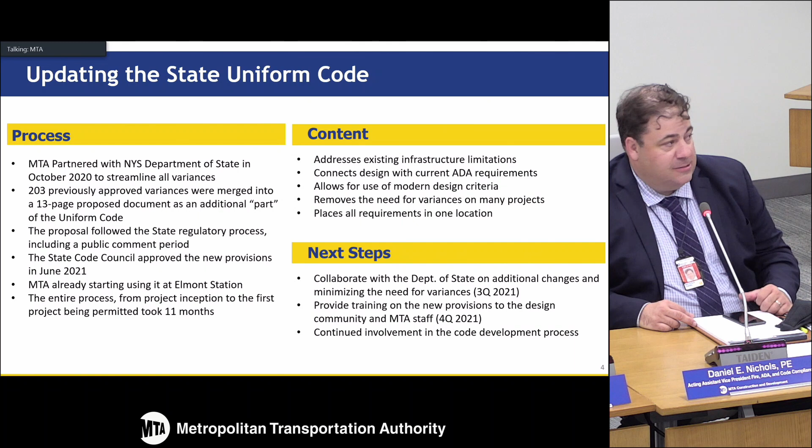I'll just add that it wasn't mentioned at the outset, but Dan Nichols, who's making this presentation, happens to be one of the premier experts on New York State Building Code, and we were very lucky to have him join the MTA team to help develop this, because it saves an enormous amount of time going through the bureaucracy of getting code variances, since the building code was not aligned for mass transit facilities.

Kevin: I think this is a great idea. Just curious, who issued the first permit for Elmont - was it a village, a town, or the county, and then we were able to amend it on our own? Response: No, we worked forward, and Elmont understood they would need a variance to do this, which in normal times would have been a 3 to 6 month extended process. But we were right in the middle of this adoption process through the regulatory process, and we had indicators along the way that we would, if it didn't work, pull the plug at the end and go to a variance. We had that ready to go, but luckily the Code Council voted in June, and away we went.

Is this only for buildings, or should MTA be able to issue its own town curb cuts and highway permits and things like that? Is that envisioned in what you've already done, or is that something for the future? We are going to do much more modification as the law, the Uniform Code Act, allows us to, which has a lot to do with jurisdictional authorities. There's a lot more work to do, and that's one of the items on our list to work on.

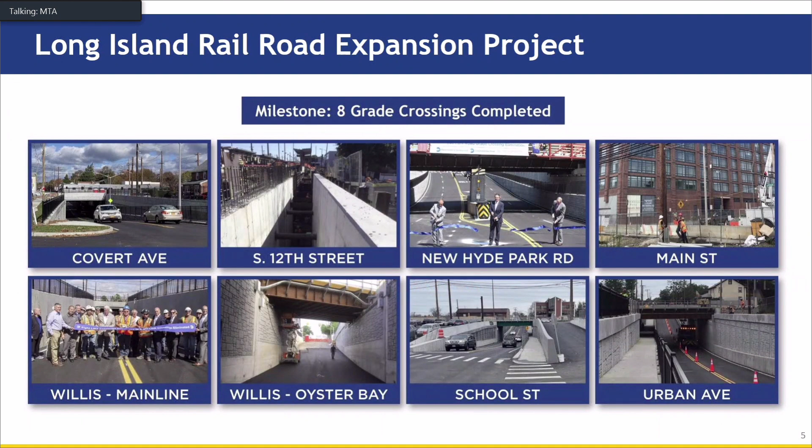Just three project updates, if I could. Some speakers may have already mentioned this, but the milestone of getting 8 undergrade crossings completed for the 3rd Track Project has been achieved. Most notably, the double crossing at Willis is now open. To correct the record, the crossing at Willis was not wide enough to put in a sidewalk, so we were about to put in an overpass bridge, which will be there next. Key to the completion of these 8 crossings, and at Willis, is that it allows us to move forward with all the work in Mineola, which is really the critical path of the project. That is well underway and still on target.

What's the status of Main Street in Mineola? Main Street in Mineola is closed. There's supposed to be a pedestrian overpass installed, correct? That pedestrian overpass is about to be constructed now that we can have access to the ground to do that. Yeah, it's underway.

I seem to have lost the presentation. Can we get the deck back up there?

Thank you. I'll get there.

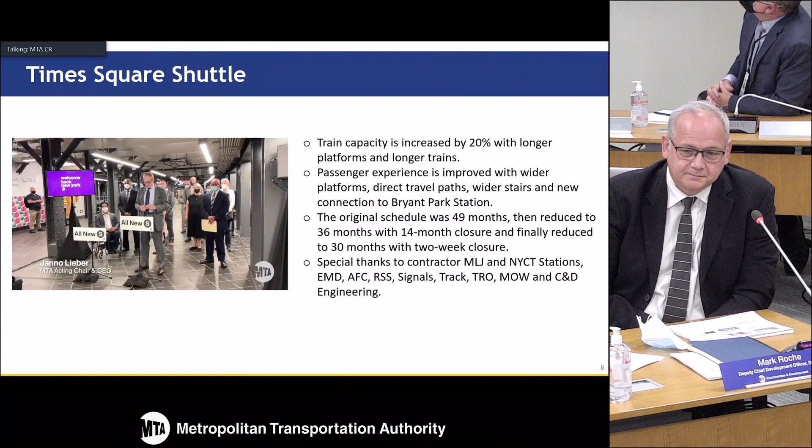Today we add the rebuilding of the Times Square to Grand Central shuttle to our list of accomplishments. The shuttle was part of the very first subway line that opened in 1904. It is among the very oldest parts of our system. Now it's finally been rebuilt.

The new shuttle is easier to navigate. Look at it. The tracks have been straightened, and there's now a single and much wider platform. This allows us to run longer trains with more capacity during the peak hour and to speed boarding, because we all know that the shuttle is all about moving quickly.

This is a very proud moment for construction and development, where we've now made the station fully ADA accessible. We've provided a free transfer over from Times Square to Bryant Park. We had many, many challenges along the way, COVID being one of them. But again, we're very, very proud of this project.

It is really transformational along this 42nd Street connection corridor. Kudos to the project team. They got this work done faster than anyone expected, and it was on schedule and on budget. Those are the words we love hearing. Couldn't have said it better.

Just one final point - all the folks that are involved in this are listed in that last bullet, and I couldn't tell you how much cooperation we've had in those 15 days to make sure that this happened on time. It was an extraordinary feat of coordination between everyone, and I thank everybody very, very much, particularly the operations folks.

Just one update on one of the CBTC projects for a second. This is the QBL line, the Queens Boulevard line. The area in red remains to be completed. Just under 90% of the line is already CBTC enabled. We have delayed the completion of this last section from July of this year to December of this year to enable some of the Thales and Siemens software to be updated.

Given the numbers of folks on the line, we didn't want to have updates to computer software interacting in ways that we couldn't predict. So we're doing some more testing behind the scenes before we implement some of those final upgrades by the end of the year. That's probably new information - that we've delayed it from July till the end of the year.

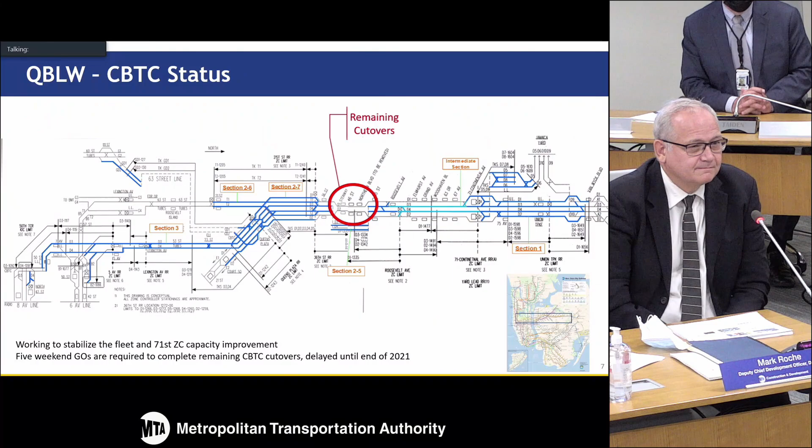So we've all heard the stories about delays to E, F, M, and R trains at various times of day due to this project. Is that because not all of the equipment that runs on those four lines can read the new signals, or is it something else that's causing these delays?

I'll give you an example of the kind of thing that we've been dealing with. Behind the scenes, when we test equipment, we expect a number of signals to be handled by a certain piece of equipment. When we turned on some of the system, we got four times the number of signals being delivered to that equipment, and it didn't know which one to handle first.

So we've had to take that offline and ask, well, what equipment has been sending that signal and why, and what's the priority? It's designed to fail safe, so there's no question about it, but it's just the number of signals in some of the equipment was unexpected, given some of the geometry. That's the typical type of local issue that we've been dealing with.

We're also installing CBTC on portions of the Culver line. Are you experiencing the same issues there? We haven't quite got to that situation yet, or on the 8th Avenue line. That's next, but this is by far the more complicated line, and the software that's been updated for this will hopefully clear the path for those lines.

Did we undergo this kind of disruption on the 7 or the L line when we were doing them? Yes, and very, very similar, but with different equipment. And since this is interoperability, it's sort of the next level of interaction of those equipments. We have upgraded some of the equipment, so it's new issues, but similar to those lines.

I will say that for the future lines, we are looking at the idea of further, more detailed testing in a virtual world to make sure that we can minimize this type of reliability testing in the future.

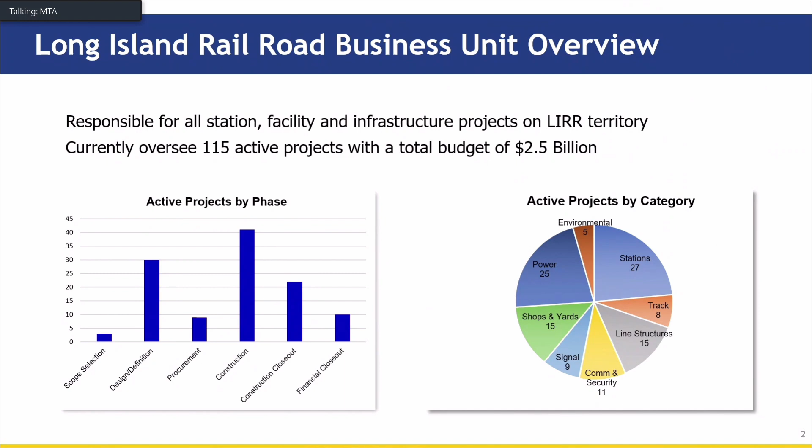It's been a while since we were last here presenting live, since October 2019. We're working on quite a few projects, 115 in various stages, whether in design or construction, representing all the active asset categories that we have.

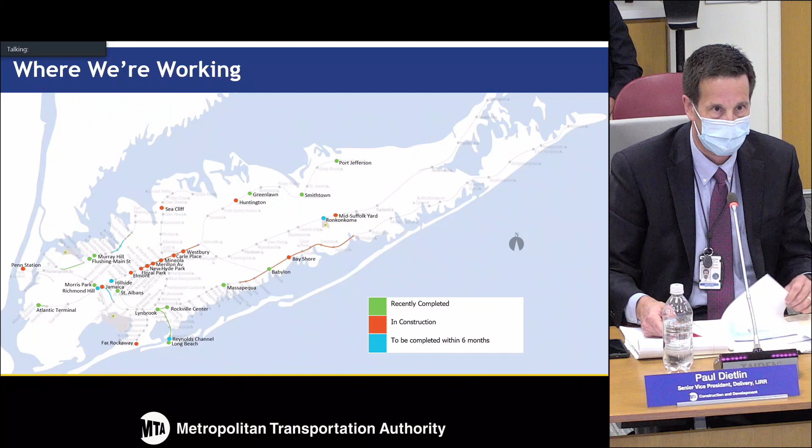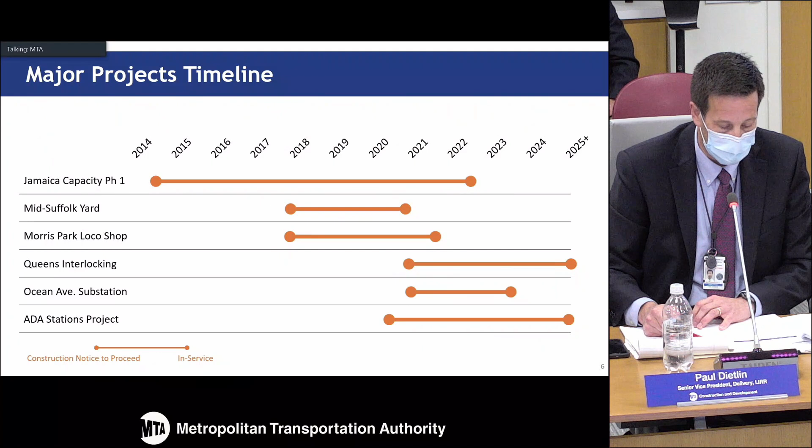Here's a timeline of projects, just to give you an appreciation of some of the durations. In many cases our projects require significant phasing or staging, and also equipment procurements that take time. All of these contribute to the duration of the projects. We work very hard to find ways to minimize the timeline and be more efficient, like design build and bundling.

Now I'll talk about a few of our specific projects. Here is our Mid-Suffolk train yard. It's completed now, in service, and it's one of our Eastside Access Readiness projects that will support our rail service increase.

We added 11 new tracks, each holding 12 car train sets, so we have 22 tracks out there in Ronkonkoma at this point.

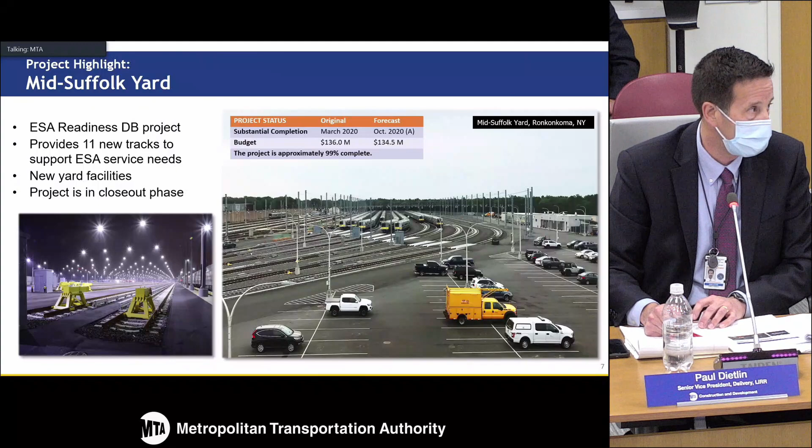We did complete slightly behind our original plan, but this is consistent with our prior CPOC updates where we had noted delays due to impacts related to our substation power feeds for our new DC traction power substations.

Here's just a few pictures: one of our signal locations for the new connection into the yard, our DC substation, and then of course the support facility on the right.

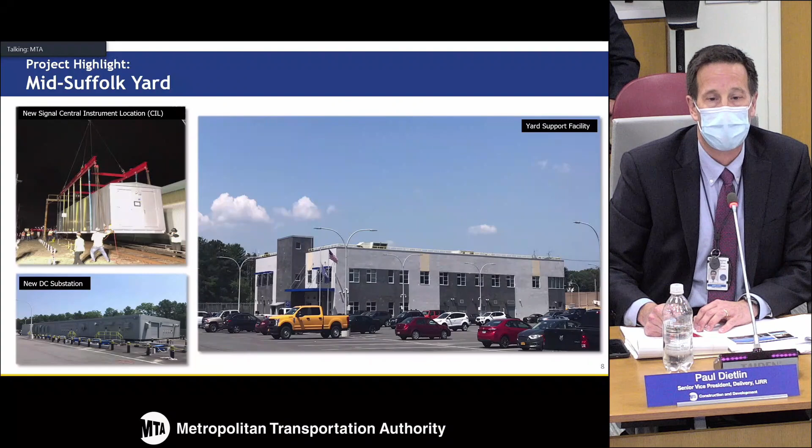Now I'll move on to Morris Park Locomotive Shop, and we actually just recently achieved substantial completion there. This shop will replace our 130-year-old roundhouse.

You can see an old picture in the inset. The new shop has 4 tracks, a drop table, bridge cranes, and other shop equipment to help us effectively and efficiently maintain our fleet, improve our turnaround time, and that all leads to increased reliability for our fleet.

We did have some challenges since we had last met, and the project did slip based on some previously reported risks. We had the issue with the long lead equipment.

At prior meetings, I had talked about the closure of the shop equipment manufacturer who was supplying our turntables and drop tables. The vendor had to develop a new design based on already installed equipment embedments. It was a bit of a design challenge for them, and it took a little longer than anticipated.

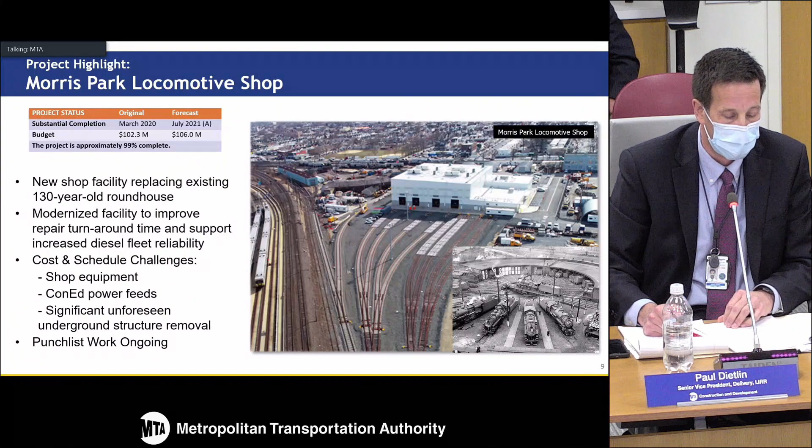During commissioning testing of the actual drop tables, we had 2 failures of bearings on the lift posts that raise and lower the drop tables. While the bearing replacements functioned properly, the new vendor improved their bearing design, and given the extended warranty requirements of the contract, they offered to replace all of the bearings with a new, more robust design.

We also had a power risk facing the shop. Con Edison was going to provide a 5th feeder, and the design builder was supposed to assume that in his design. However, during the course of the project, Con Ed decided there was existing capacity within the existing 4 feeders to the Morris Park area, so we had to spend some time redesigning some of the electrical service and distribution equipment in the building.

Overall, these delays did lead to a slip of the project. As far as the budget, we are forecasting a slightly higher EAC as well, for estimated completion.

Mainly due to the significant amount of unforeseen structures underground that we required removal. If you know about the historic use of the Morris Park complex, there were a series of shops underneath the footprint of where this building is now. But as we wrap up this project, we will perform our normal lessons learned process and review what happened.

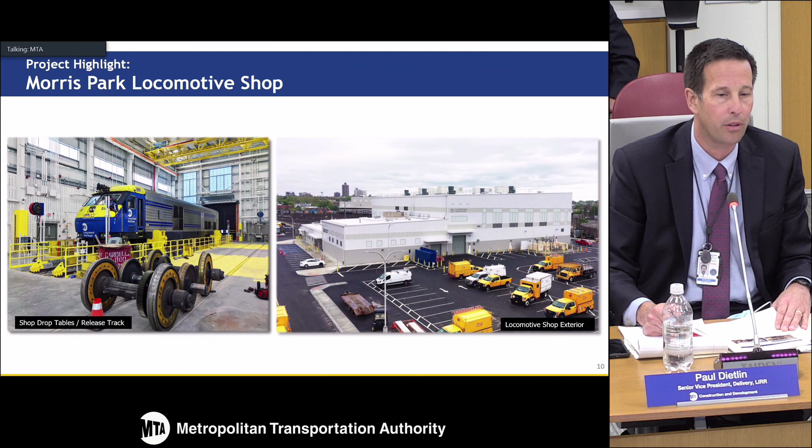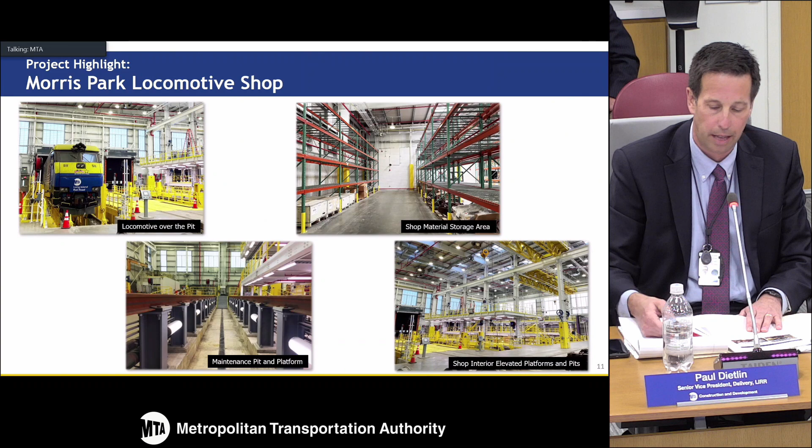And again, another photo of the pit, the drop table pits. There's two maintenance pit platforms with elevated track. There's storage areas for materials and parts. And then, of course, there's elevated work platforms for the staff to help maintain the equipment safely.

So Jamaica Phase 1, as I've previously talked about, is an Eastside Access Readiness Project. We finished constructing a new Platform F at Jamaica and associated track infrastructure that will allow us to support Eastside Access opening day service. The third-party contractor did complete Platform F in February of 2020.

We actually started to use it, but with the service reductions initiated due to COVID, we took it offline for a while. Looks like we'll be using it again this fall as we support new Elmont event day service.

So overall, our project still remains on budget. We're about 85% complete. There are some track, signal, and third rail work for some universal crossovers and interlockings that'll happen. Those efforts support really the next phase of Jamaica, or they put us in play.

Yes, so I've spoken about this, as have others, about Platform F. There's ways it can be a great success, but if you're going to make all of those folks who now have either a one-seat ride or an across-the-platform transfer at Jamaica go up and over to Platform F to continue their trip to Atlantic Terminal, that is not going to go over well.

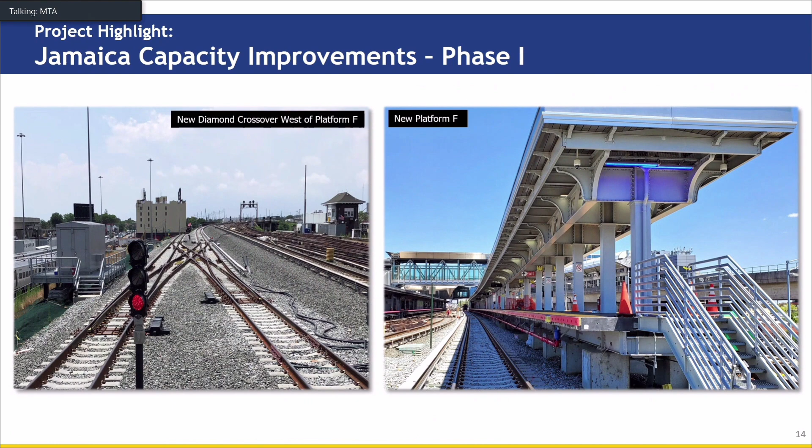Here's a photo of the platform completed and the Arts for Transit effort up to the mezzanine. Again, here's the western end. This is our Diamond Crossover, showing the new westerly bridge connection from Platform F to platforms A through E.

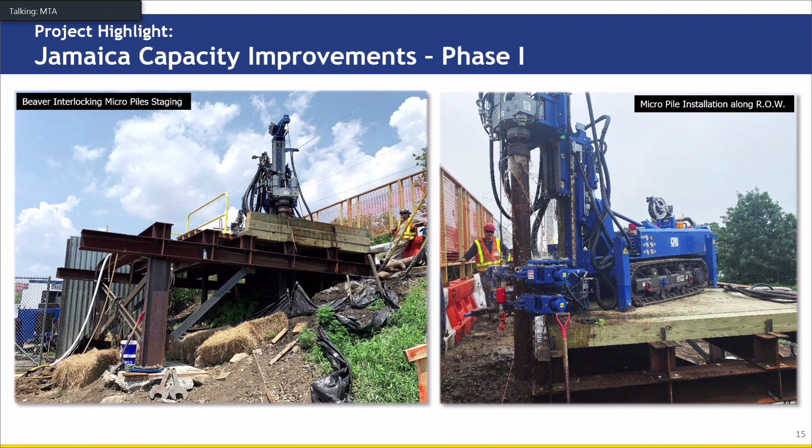Beaver Interlocking - this is one of the interlockings we're adding. Signal equipment is being installed up on the hill, on the right of way, and we've used a small business mentor program contractor here to do some of that work. They're doing a very good job, actually.

Now this is really Jamaica Phase 2, the next piece. Jamaica Complex was constructed in 1913, and it is really, at this point, our major system capacity constraint. Over the next several programs, we're going to look to dramatically increase our speeds through Jamaica.

Due to the overall complexity of the station and the interlockings, we'll strategically stage and phase this effort over multiple programs to reduce our impacts to customers and operations while maintaining service. I have a brief video here that will talk about the first key elements of JCI Phase 2. Hopefully this works.

The Long Island Railroad's Jamaica Complex is one of the busiest stations in the nation. Hundreds of thousands of regular LIRR customers depend on over 1,200 daily trains to move them to their jobs, schools, and families. With 10 of the 11 LIRR branches running through Jamaica, as well as available connections to 3 subway lines, 18 bus routes, and the AirTrain to JFK Airport, it's more than just a transit hub - it's a major economic driver for the region.

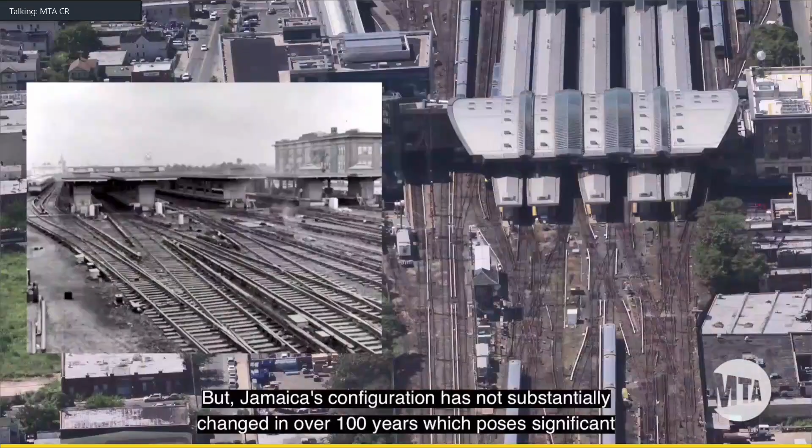But Jamaica's configuration has not substantially changed in over 100 years, which poses significant challenges to accommodating current and future levels of Long Island Railroad train service. Every morning, the antiquated layout of the interlocking causes conflicts with westbound traffic. In this first example, the westbound Atlantic Branch train has to wait to enter the station until the Montauk Branch and Mainline Branch trains pass. Now a Mainline Branch train has to wait until that Atlantic Branch train passes. And again, just a short time later, another Atlantic Branch train has to wait until Montauk Branch and Mainline Branch trains pass.

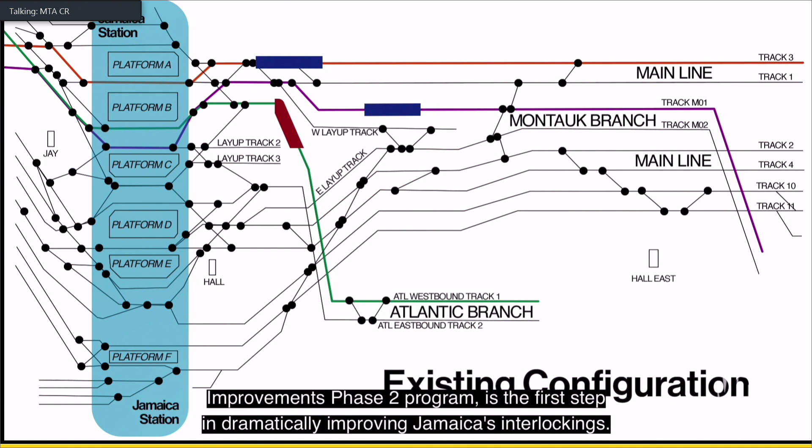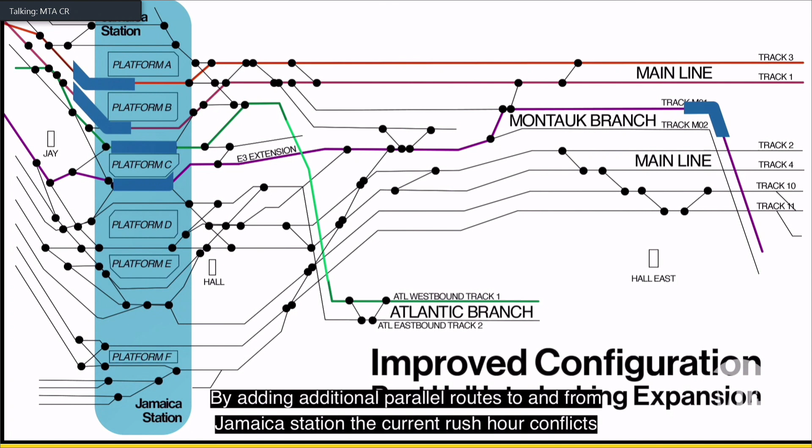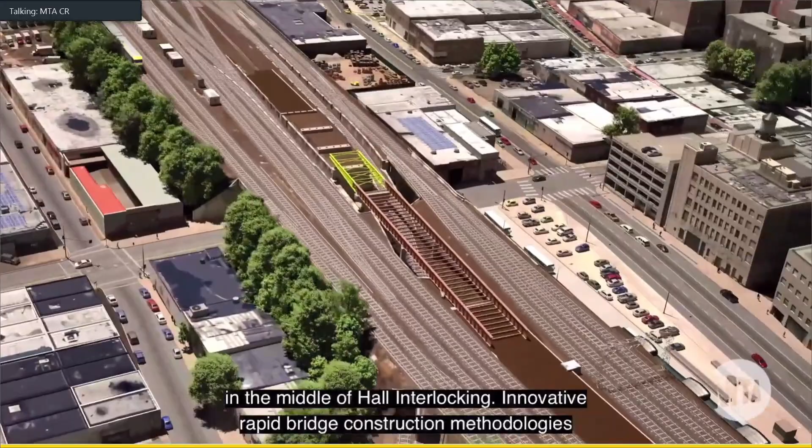The Hall Interlocking Expansion Project, part of the larger Jamaica Capacity Improvements Phase 2 program, is the first step in dramatically improving Jamaica's interlockings. By adding additional parallel routes to and from Jamaica Station, the current rush hour conflicts will be eliminated and train routing significantly improved, resulting in a more streamlined commute through the station. The new routes will be added by building a new 2-track railroad bridge in the middle of Hall Interlocking. Innovative rapid bridge construction methodologies will be utilized to minimize impact to rail and road traffic during execution of the project.

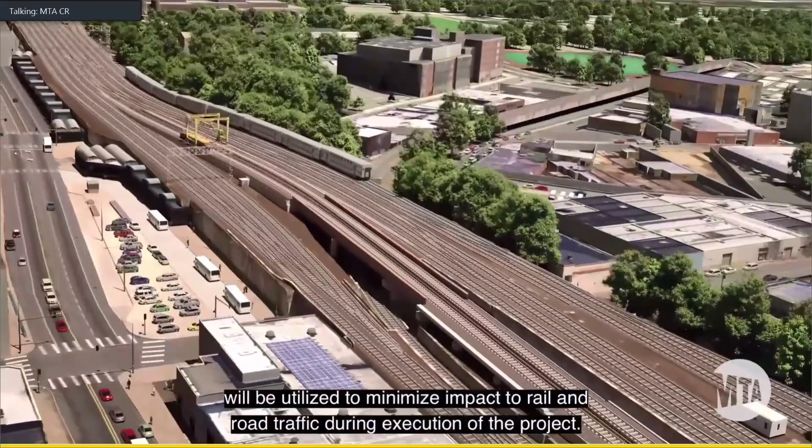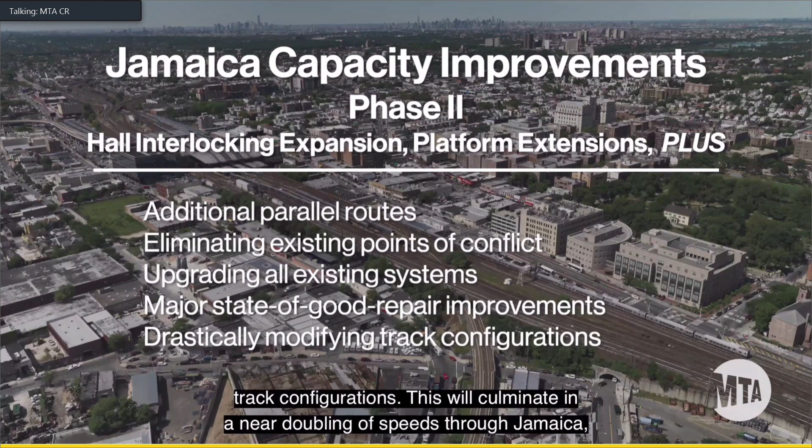As part of future JCI Phase 2 work taking place in later MTA capital programs, Jamaica platforms A through E will be extended to accommodate 12-car trains. That means less passenger inconvenience and faster train alighting and boarding, resulting in less station dwell time. In addition, the JCI Phase 2 program will be implementing additional parallel routes and eliminating existing points of conflict, upgrading all existing railroad systems throughout Jamaica, undertaking major state-of-good-repair improvements, and drastically modifying track configurations. This will culminate in a near doubling of speeds through Jamaica, shaving 3 to 4 minutes of commuting time in each direction, as well as resulting in a much more reliable commute for LIRR passengers traveling through the station.

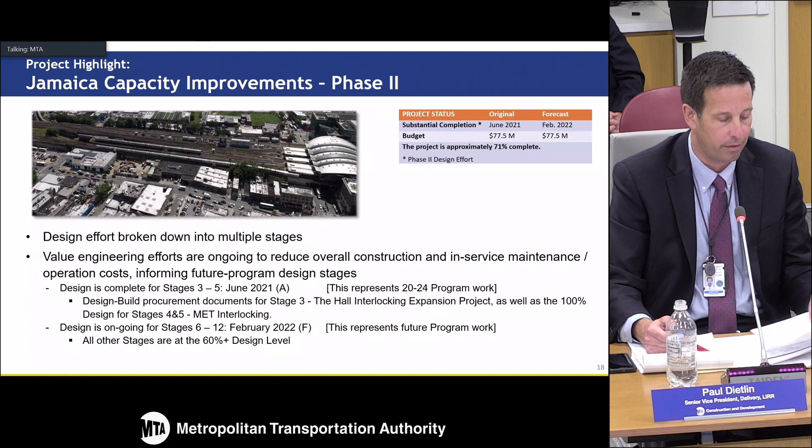This is actually the design effort we're going through right now. We've completed our design for the 2020-2024 program elements, achieving those on schedule. We're going to finish the design by February 2022, slightly behind our original plan because we're doing a tremendous amount of value engineering and best value analysis to eliminate redundancy, reduce infrastructure, better the track design, and more standards. We look forward to completing that in February, and we're still on budget.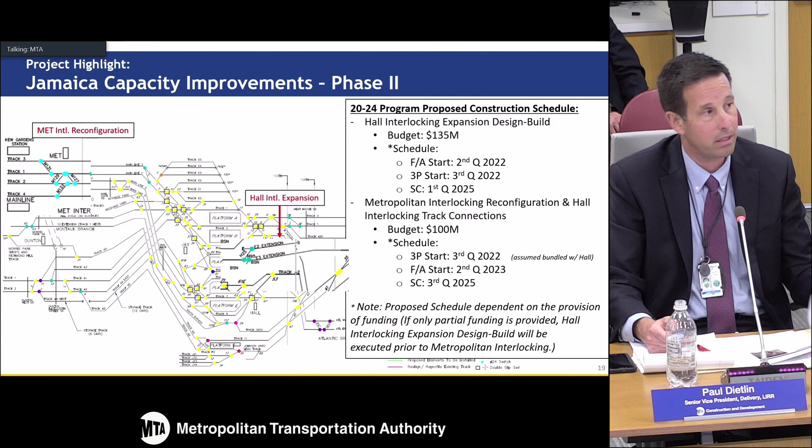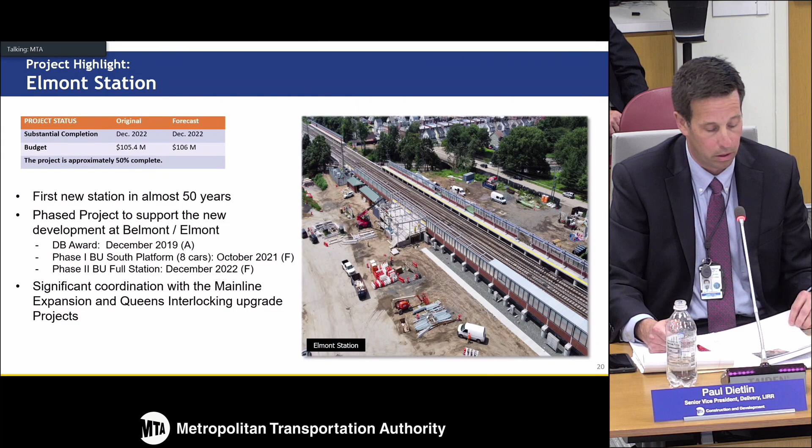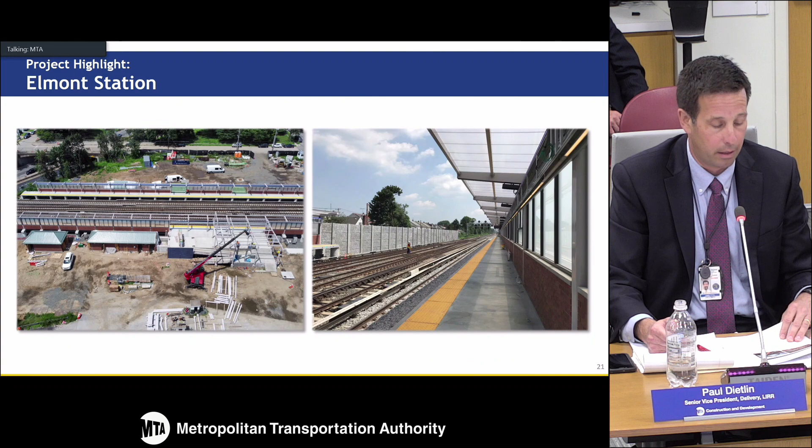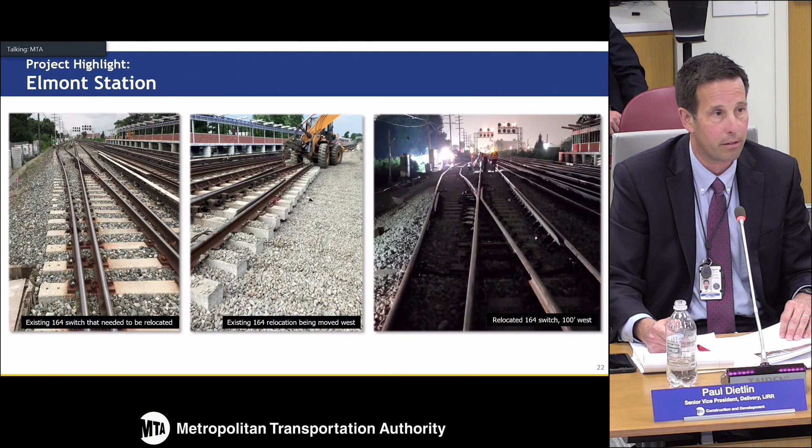The full build out will be completed at the end of 2022. Here's a couple more photos. You can see the good progress on both the north and south platforms here, and the barriers. Here's some pictures of some force account support work, significant track reconfiguration that will allow us to construct the platform, and also support track changes back to the main line. There'll be more to come on that one.

So that's all I have.

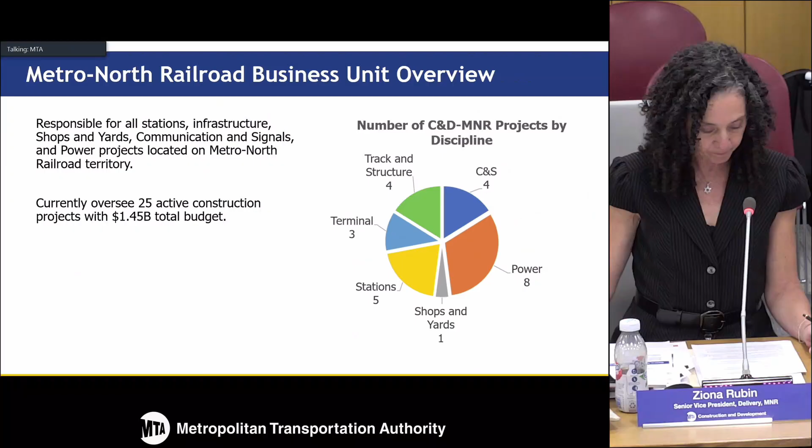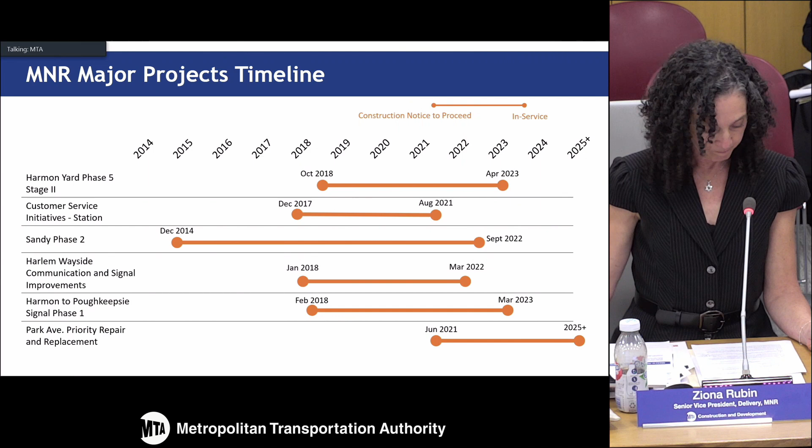Now, projects. The Harmon Shop Phase 5, Stage 2 is under construction. We're building a main shop and storeroom and installing all the facility's heavy equipment such as hoists, overhead cranes, and lifts. The project requires extensive coordination with internal and external stakeholders so that work continues smoothly while the yard is operational. The foundation and site work are complete, and we are now installing the structural steel in the building envelope. The top picture shows the old demolished Building 6, and the bottom 2 pictures show the rendering of the new building.

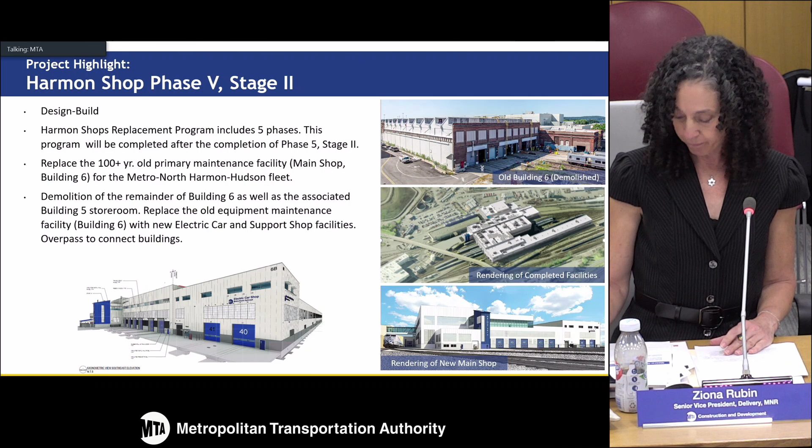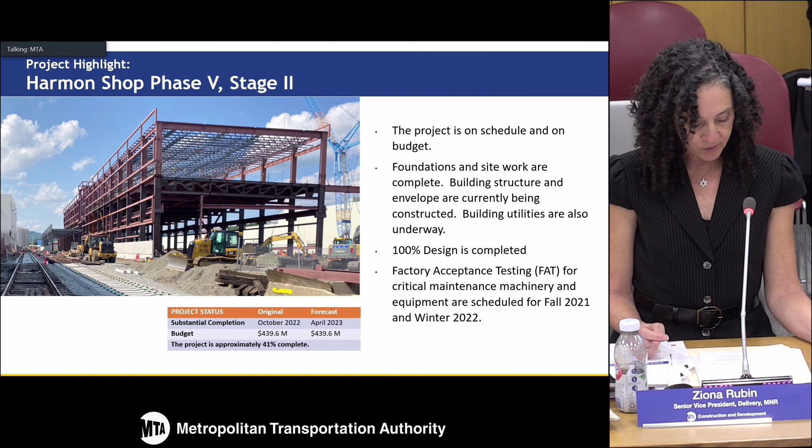This slide shows a picture of the newly installed structural steel. The project is expected to stay on budget and be completed in April 2023. The 6-month delay is due to the closeout of the previous project, Phase 5, Stage 1.

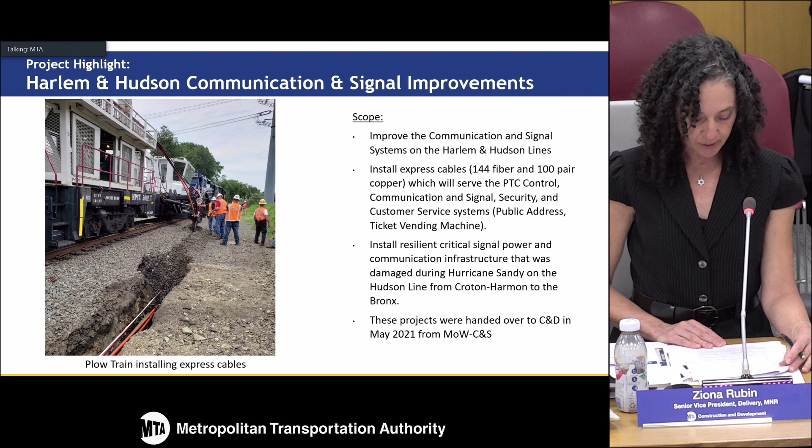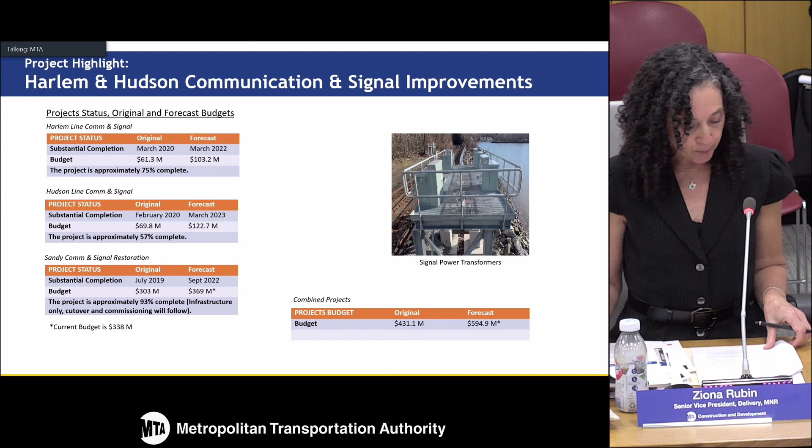The reason for the delay and budget overruns are described in the next slide. The communication and signal improvement projects on the Hudson and Harlem lines experienced delays and budget increases due to delays related to limited track outages stemming from operating in two-track territory while competing with other projects and maintenance work.

Delays are attributed to a shortage of flagging and force account staff stemming from staff shortages.

Delays to the Harlem Line project were attributed to additional design work and support needed to install new poles capable of supporting the new aerial cables. This work was not identified originally during the design.

Additional costs stemming from the extended construction period, which was not factored into project planning and design, resulted in additional cost. The Hudson Line project needed redesign due to unforeseen soil conditions due to lack of preliminary site investigation.

The Hudson Line project also preceded PTC. Therefore, PTC requirements incorporated into the plow train delayed and added cost to the project.

The Sandy project's main challenge is obtaining the necessary track outages to perform the work. Additionally, lack of flagging, power, track, and C&S support due to staff shortages caused delay. The project also suffered delay and additional costs due to prioritizing the PTC work.

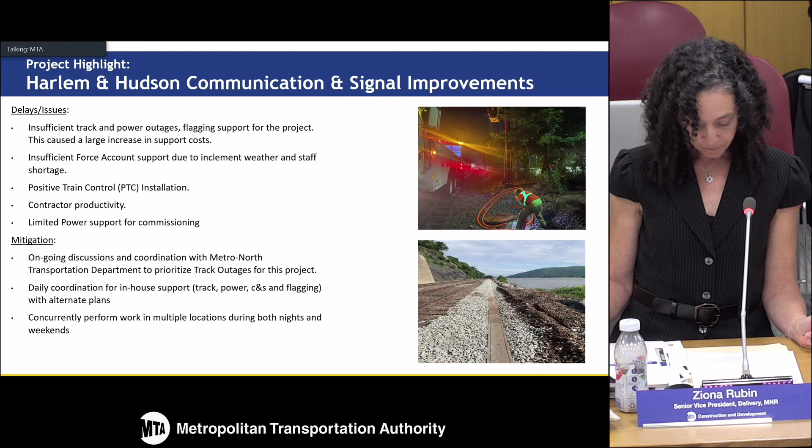The Park Avenue Viaduct is the main artery that carries all passenger trains to and from the heart of the Metro North system, Grand Central Terminal. Park Avenue Viaduct was built in 1893 and is over 128 years old.

The viaduct is the main artery where the Hudson, Harlem, and New Haven lines converge into and out of Grand Central.

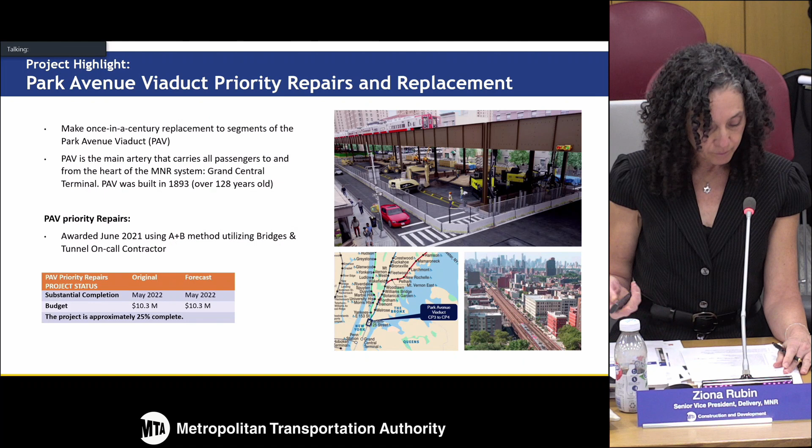The Park Avenue Replacement Project will make a once-in-a-century replacement to segments of the Park Avenue Viaduct.

The master plan phase is complete. Preliminary engineering solicitation begins this quarter, and the design-build project RFP release is anticipated in late 2022.